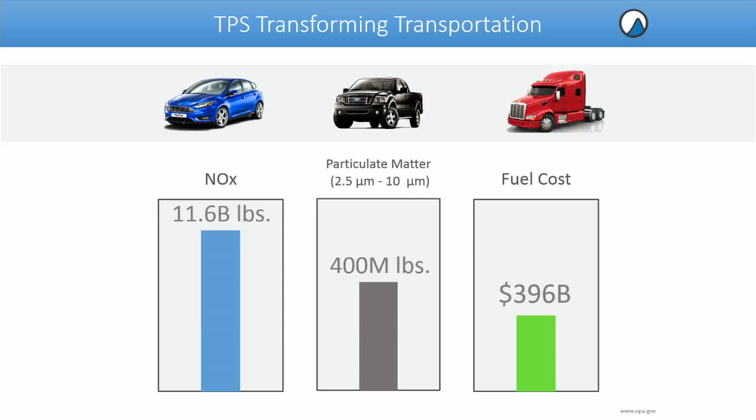There's more than 22,000 deaths due to NOx and particulates in the United States alone every year. More than 9,000 of those are in my home state of California, and most of those are actually in our company's home city of Los Angeles. So if you look at the worst offender of NOx and particulates, it's on-road vehicles in the United States. There's about 12 billion pounds of NOx, about 400 million pounds of particulate matter, and we spend about $400 billion on fuel every year.

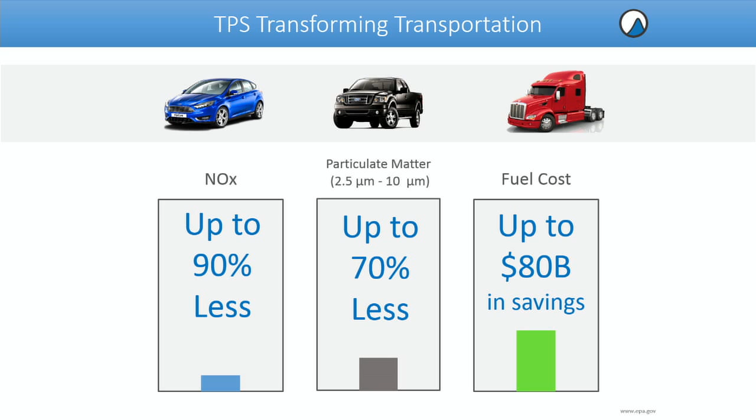With TPS technology, we can potentially reduce NOx emissions by up to 90%, particulate matter by up to 70%, and save about $80 billion on fuel every year. And the biggest part of this is that we can potentially impact 18,000 lives in the United States alone every year by just applying our technology to on-road vehicles. And I say just because we actually have applications in marine diesels, in locomotives, and aircraft as well.

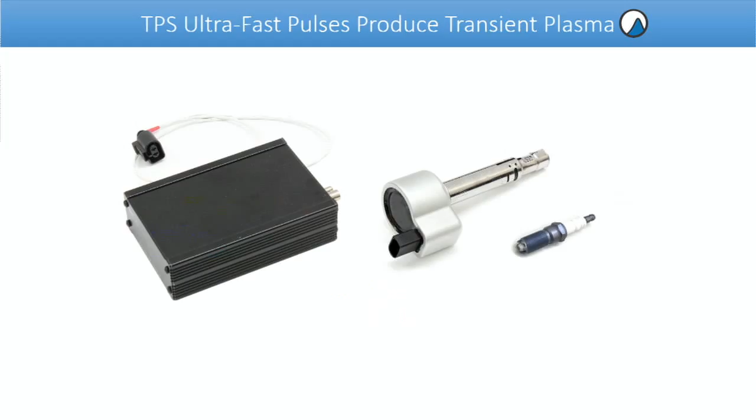So let's jump right into the technology. What we make are devices that deliver ultra-fast, nanosecond-long, high-voltage pulses. These pulses are so fast, the energy is very small, but we're able to put in the power of 6 semi-trucks in one tiny little pulse. And we're using this to ignite a fuel-air mixture and fundamentally alter that combustion chemistry.

So to take a look at how we alter it, we have to look at what exists today. Ignition has not changed in gasoline spark ignition engines in more than 100 years. So let's take a look at what that is. That's a spark ignition. I'm not sure how many of you are familiar with this. It's just like the spark in your stove. Basically what you do is you ramp up a high voltage, and eventually it causes a breakdown, and a spark jumps across that gap.

Through that single channel, all of the current flows and heats up the air. This is a very inefficient way to transfer heat. It's like holding a match to the flame. About 1% of the energy in that spark actually goes into the fuel. What we do is we cut off that high voltage pulse before that spark can ever form. There's no breakdown, so we just have an ultra-fast electric field. And the result is this.

We get a non-thermal, what we call a transient plasma, because it's transitionary. In this case, all the energy goes into producing energetic electrons directly in the gas, rather than through heating. We call it non-thermal because you can stick your hand in it, it's cold. We'll actually show you a photo of that in the next slide. And in this case, 60% of the energy goes directly into the gas instead of 1. And we have the added benefit of this being distributed volumetrically, so you get distributed multi-point ignition.

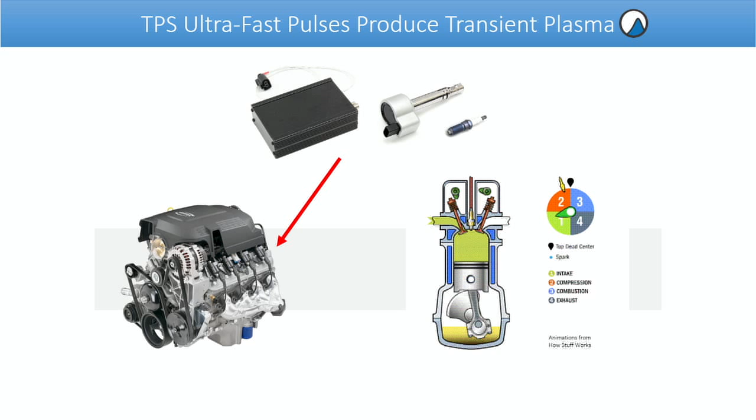There's another application that's not just for spark ignition engines. I'm not going to talk too much about it now, but feel free to come to my booth and ask me about it, where we can actually apply this technology directly in the exhaust of diesel engines, for example, and treat the emissions that way through oxidation of the NOx and particulates. So there we're actually seeing a 90% reduction in NOx. We're seeing 70% reduction in particulates.

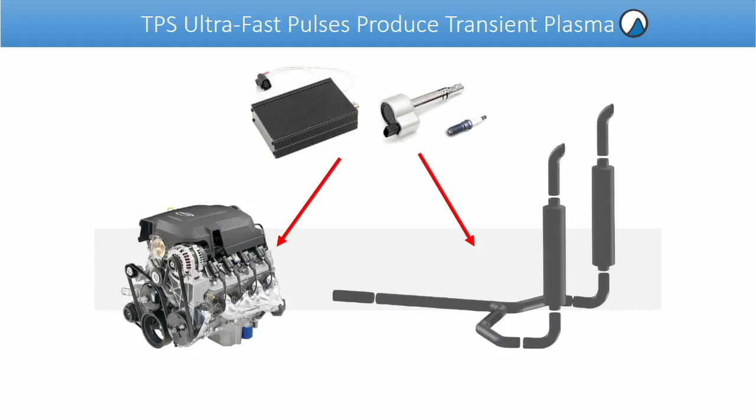And my colleagues were actually just on a ship this weekend. I couldn't participate because I was traveling here. But in a program sponsored by shipping company TCC, they were able to measure SOx as well on actual heavy fuel oil on a ship out of Oakland Port. They're seeing about a 30% reduction in SOx.

So this technology did not come out of nowhere. This came out of the University of Southern California. My PhD advisor, Martin Gundersen, had been working on the Pulse Power Group for about 30 years, making these ultra-fast pulses and applying them to all different things. He had the idea for applying these to ignition in 1994 when they were looking at applying the pulses to diesel engine emissions for NOx remediation and trying to understand the chemistry and physics of that process.

Since then, the technology has substantially reduced in size. When I first joined the group in 2006, we were looking at a system that was about the size of a microwave. Just prior to that, it was about the size of a fridge.

So even though I showed up and we were working with the Navy and the Air Force and some car companies doing demonstrations, even though it was working well, it was kind of like, okay, well, you're not going to put something this big in an airplane. You're not going to put it in a car. So what we've been able to do in the past years is to leverage advances in high voltage switching and significantly reduce the size of the technology.

So we have the background IP from the university. We formed the company in our garage in 2009 just to address an immediate market of there being more demand for research on nanosecond pulse power. So we are entirely funded by the revenue of selling our research devices to about 50 laboratories around the world that are looking at using nanosecond pulses.

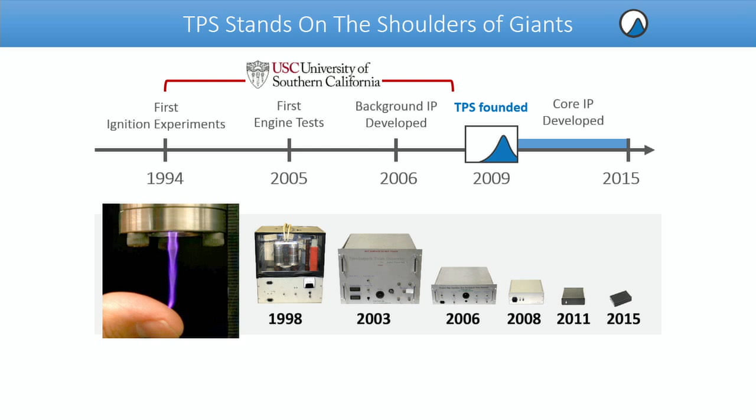So we have a great technology. We needed a great team to bring this to market when we realized this is actually small enough, efficient enough to go into commercialization. So we have the best pulse power team you could possibly have in the world. This is a small field. We go to conferences that are about 300 people. My PhD advisor, Martin Gundersen, is still heavily involved, works with us on a weekly basis. He's still a professor at USC. He's the world leader in pulse power, in particular nanosecond pulse power.

Andy Kuthi, also on our technical advisory board, is the research scientist who taught my colleague Jason and I everything we knew about the technology to the point when we could then go run out and develop our own knowledge. Jason Sanders is my friend and colleague from the first days of getting this going in 2006 at USC. We've been working together since then, and he is truly brilliant in this technology. He is unmatched in his talent in nanosecond pulse power. So we run the company right now. There's 6 people in the company, and we have an extended experience on the board.

We knew we needed the business talent. We very much believe in knowing what we're good at and adding to that as much as we can through other people's experience. Our board chairman is Mike Mann. He's the CEO of both public and private companies in the past. He was a senior executive in aerospace. Mario Leone is our automotive advisor. He's a former senior executive from Fiat Chrysler. And we have Hoshi Printer, the former VP of finance from Xerox.

So getting this technology to market, it's a huge market. You have to have a strategy to actually get this out and make an impact. So what we did is we looked for a market that had a time-critical need where there was no cost-effective alternative, and that led us to natural gas. So if you take a look at the rising cost of diesel fuel, we've heard some of this today, truck owners are actually looking for an alternative. They spend about $45,000 a year on fuel on average, and they're looking at natural gas and saying, okay, it's cheaper, it's more stable, domestic source. And they're saying, okay, well, if I can convert to natural gas, I can save about $20,000 on fuel costs.

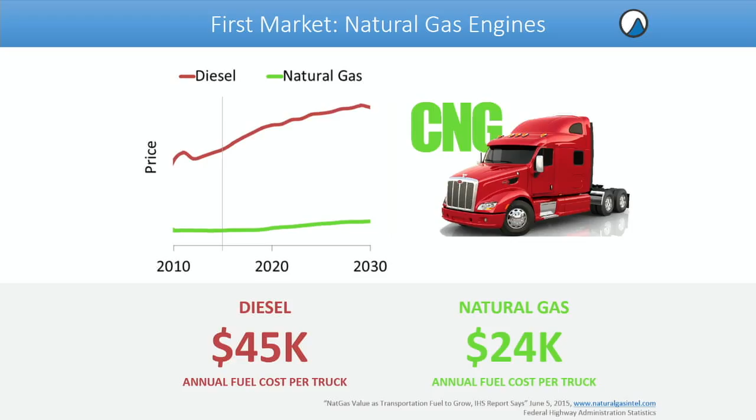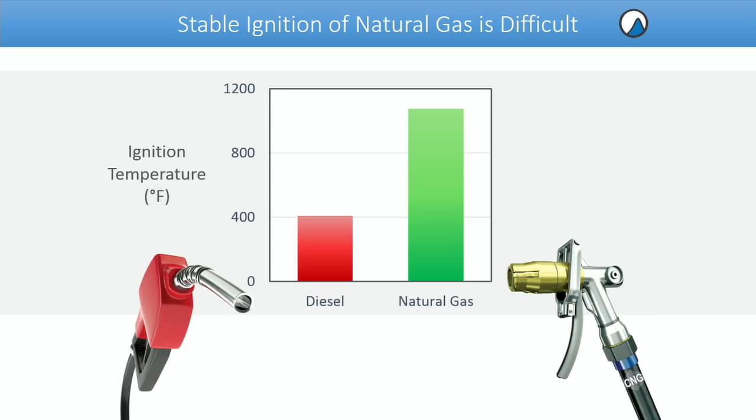So the question is, why aren't they doing it? Because they're not. You can read a Wall Street Journal article relatively recently about this. It's not happening as quick as we'd like. And one of the major challenges is actually technical. The ignition temperature of natural gas is about 3 times that of diesel fuel. It makes it very difficult to ignite with any kind of stability. So now you might be thinking, but I've seen natural gas vehicles on the road. There's a garbage truck, there's a bus, there's a Honda Civic. So what are they doing? Well, they have to make engineering compromises in order to put those vehicles on the road.

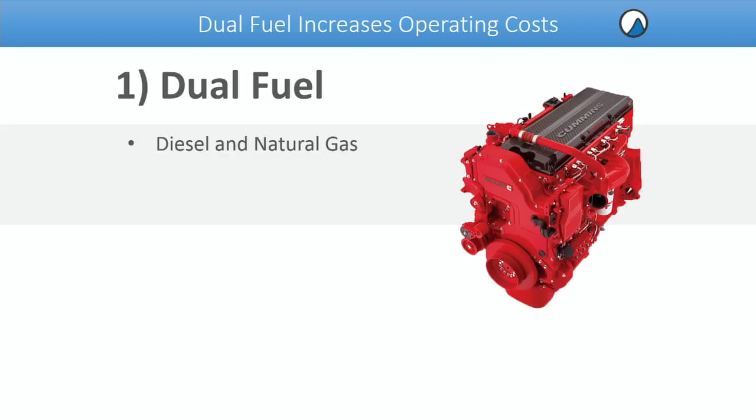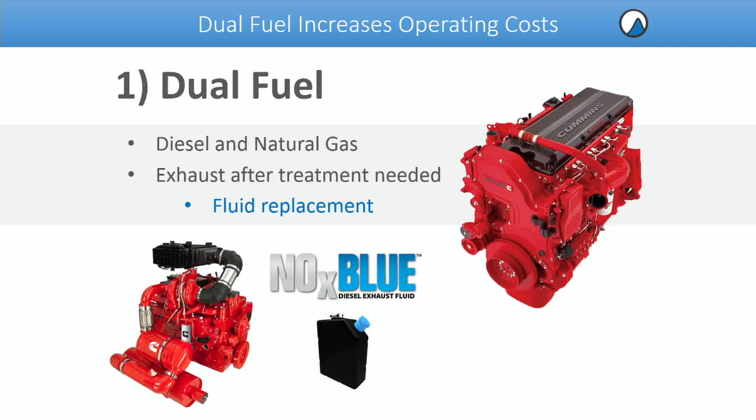So what they're doing, if they need the torque and the range of diesel, is they do dual fuel. They spray a little bit of diesel fuel in the cylinder, it starts to burn, raises the temperature, and then when they spray in the natural gas, it'll ignite. The problem with this solution is it adds overhead, both physically and in cost, and it requires exhaust aftertreatment that requires frequent fluid replacement. So if you don't care about the range so much, so for example, a municipal vehicle, a bus or a Honda Civic, you can sacrifice range by reducing the compression ratio and then increasing the energy for ignition. So in this case, you can dump about 10 times the energy of a traditional spark into that spark plug, and you can run the engine.

This is what the little Honda Civics on the street do. Some of the buses do this. The problem with this is now you start melting spark plugs, because remember I said that that spark is 1% efficient. A lot of that energy is going right into the spark plug. So if you're driving around a Honda Civic, maybe it's fine, it's local.

But if you're running a natural gas engine for power generation, where it's making money while it's running, anytime that engine goes down, you're losing money. And in the average case, they lose about $10,000 an hour to bring the engine down and to put the new spark plugs in. And currently, the OEMs are doing this every 16 weeks. So they're looking very actively for alternatives.

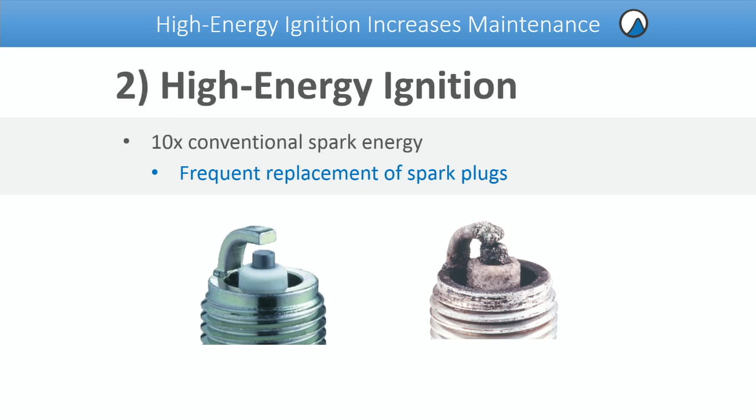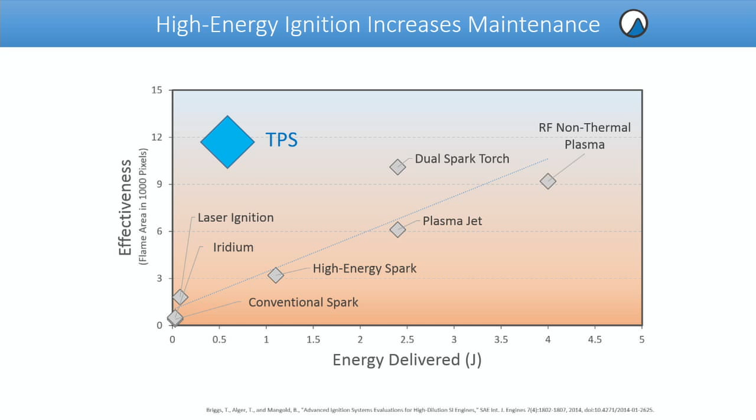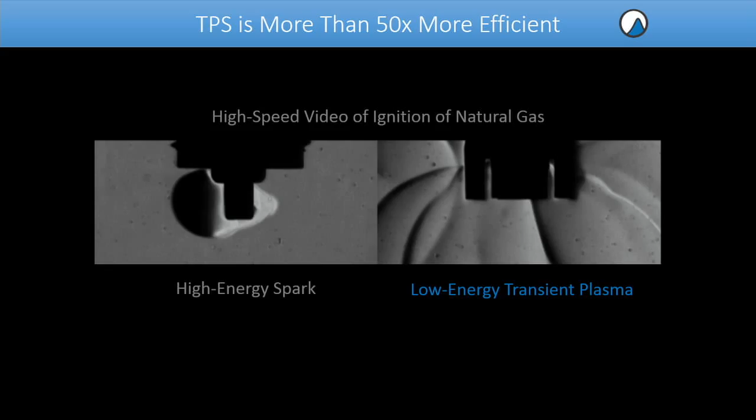So the best way to do this is to show you rather than tell you about it. So take a look at this video. On the right-hand side, you can see ignition of natural gas with our technology. On the left hand, you see it compared directly, same conditions, same time frame, with high-energy spark. This data was taken at UC Berkeley in Professor Robert Dibble's lab. So thanks to Daniel, Ben, and Tim for taking this data. So this is a great way to show, actually, in an operating environment, what our technology can do.

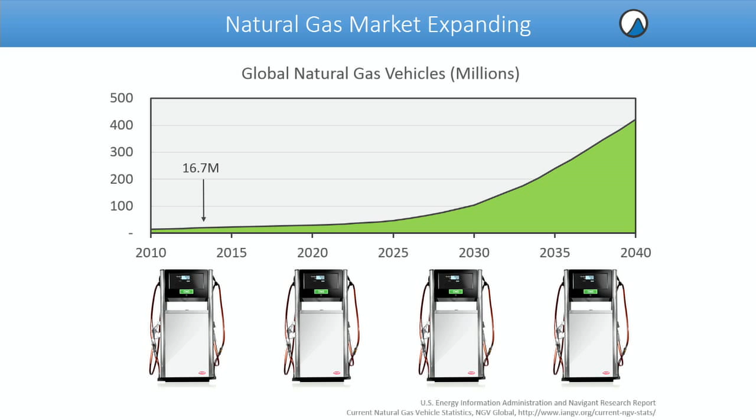So the natural gas OEMs are really excited about this because it potentially solves their problem. Because it's low energy ignition, we're not eroding their spark plugs, it'll last longer, and since it can also ignite the fuel better, they can run the engines in an ultra lean mode where they can get more fuel economy. This market is expected to expand, but even then, we've actually also heard this earlier today, by 2035, we're still expecting to be having gasoline fuel dominating our transportation use.

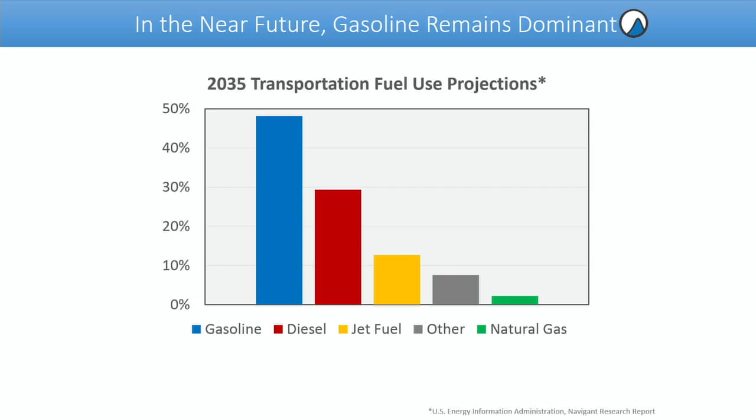So the point of starting in natural gas is they have a time-critical need. They want to solve this problem now. They're willing to work with us in the R&D stage, get the technology to the point when they can put it in their vehicles, and they're willing to pay a premium. The automotive market does not pay a premium on ignition systems. It's a commodity. They need to be able to see a lower cost point.

So what's our entry into automotive? Well, if you look at the CAFE standards, they need to improve their fuel economy by 26% by 2020. That's compared to 2016 now. And the way these automotive companies are doing this is by combining several different technologies, whether it's 1, 2, 3, 4, 5 technologies that give a few percent each. And what we've demonstrated at a national lab, so we've actually done this twice now at national labs, is that we can improve fuel economy by an average of 17%.

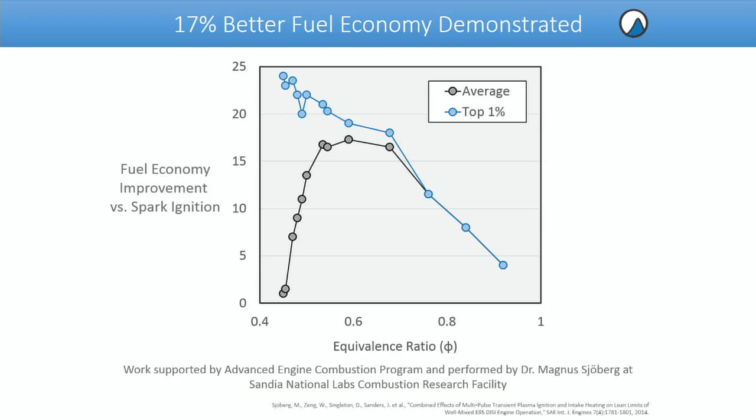And the way we do this is by enabling a combustion mode that the automakers already know about. It's called ultra-lean burn. If they're able to burn in this ultra-lean mode, the combustion temperature is lower, there are less NOx emissions, and the engine is more thermally efficient. They cannot currently do that with their existing spark ignition systems.

So if you take a look at the market, it's about a $3 billion market for ignition. And what that comprises of is what's called a Tier 1 supplier. These are the suppliers like Bosch, Denso, Delphi, Visteon, Johnson Controls. They make ignition systems for the automotive companies.

Rather than work with them directly and pigeonhole ourselves into an exclusive with one Tier 1 supplier, we've chosen to work with the OEMs. So that's taken some time to develop the relationships, to demonstrate the technologies, and that's where we are today. So again, we're funded entirely on revenue. We haven't taken any investment up to this point.

We've put in our own money to get through the concept validation. It was extremely important that we had this validated by third parties. The National Lab, Sandia National Lab Combustion Research Facility, ran our technology first on a gasoline engine. It was a DOE-sponsored program and a GM-sponsored program. We recently repeated this study on a Ford engine, also a DOE-sponsored program at Argonne National Labs. I have both those papers on my booth. The Argonne paper comes out in a month.

So this alpha prototype is an extremely important phase. Where we are right now is we actually have a device that's this big. This will be tested on a gasoline engine for the first time in January. I know you probably can't tell. I'm extremely excited about the size of this. It's very big in our field. We haven't seen any nanosecond pulse generators that can do what this can at this size. So we're really excited about demonstrating that.

So if we're lucky enough to earn your vote, what we want to use the 100K for is to help accelerate this process, getting us to the January test. We need another engineer. We're 6 people. We're all working every day, including weekends. We have more work than we can possibly handle, which is good. It's exciting, and we all love it. But we need another pulse power engineer. We've already identified who those people are. We're also going to file some provisional patents.

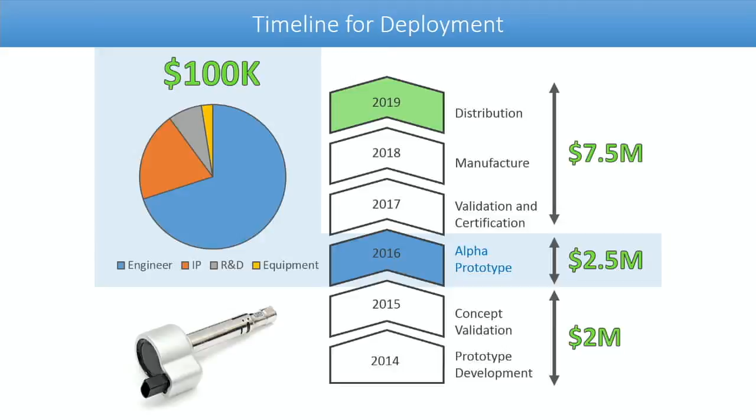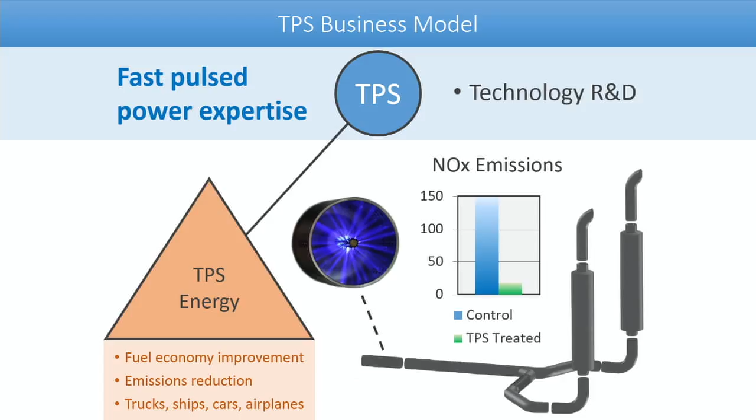So this technology has more applications than just to energy. And I mentioned before, we like to focus on exactly what we're good at, which is nanosecond pulse power. We know that field. We're growing the team to be the best in the world at that field. So our first deployments are going to be in energy. It's going to be ignition, and it's going to be NOx remediation directly in the exhaust. But there are other deployments of nanosecond pulse power. We always like to say it's a hammer and everything looks like a nail.

So there's health applications. We're actually currently working on a cancer therapy. We decided we didn't want to be a medical device company, but USC has spun out the entity, licensed our intellectual property for the field of use of medical, and they're currently funding this effort. So we're actually seeing very good results in the FDA trials. So our vision for this technology is that in 10 years, every day of your life, all of you will interact with nanosecond pulse power, whether it's in the car you drive, the bus you take, the airplane you fly in, or the food that you eat that's been sterilized by our technology, or even a cancer treatment in the doctor's office.

So with that, I just want to leave you with a very cool high-speed video of an optically accessible gasoline engine. On the right-hand side, you see our technology. On the left-hand side, you see spark ignition. This is actually combustion inside of the engine, comparing the two technologies.

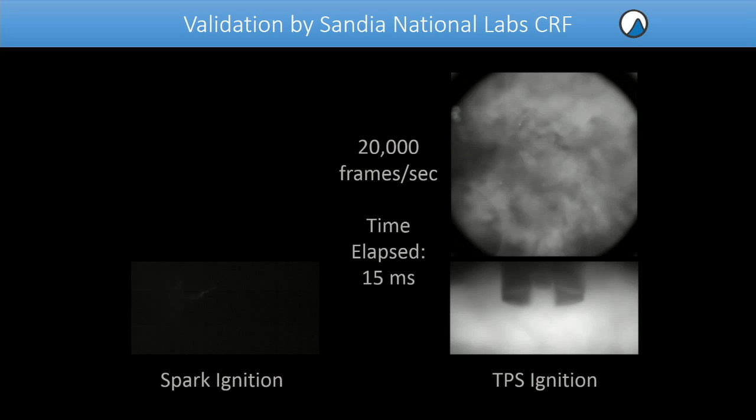Thank you. Thanks, Dan. Great stuff. Brad.

Two questions. Sure. One is, you're a technology company. Why are you positioning yourself to be a manufacturing company as opposed to letting that go off somewhere else and focusing on where your expertise is? And the other is, since this is Ocean Exchange, can you talk to us a little bit more about the exhaust treatment function and what it would take to get that in ships?

Absolutely. So thanks for your question. So for the first one, we are not positioning ourselves actually to manufacture the ignition system. We do currently manufacture the systems that we sell, the research systems, the nanosecond pulse power research boxes. But we're positioning ourselves to work with a strategic partner. The OEMs help facilitate the conversation. The tier one is going to manufacture this in the end. So the second part is the diesel emissions. I definitely want to talk more about this. But what we do is, essentially, we just stick a threaded rod down the pipe, and you just apply that high voltage very quickly and produce the plasma in the exhaust.

This is not a new technology. We've known about this for 20 years. It just takes a while to get to this point. So what we've been focused on there is energy consumption. This technology really got ramped up in interest in early 2000. In fact, you'll see a lot of references to it in literature.